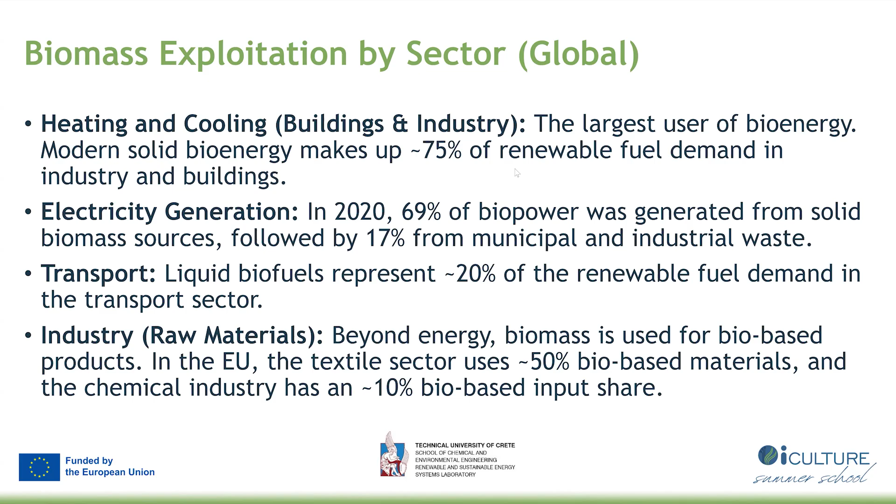As concerns the technology, biomass is very, very broad, and while I'm presenting this one, although the project is for algae, I'm trying to go back some steps to show what we know, and some of you, I'm sure, will find a way to exploit it also for macroalgae. And what this conversion means: to transform something organic into energy or other forms, in this case energy, like fuel, heat, or electricity, by using engineering methods. Yes, these methods can also be integrated in existing fuel distribution infrastructure and can cover part of the demand.

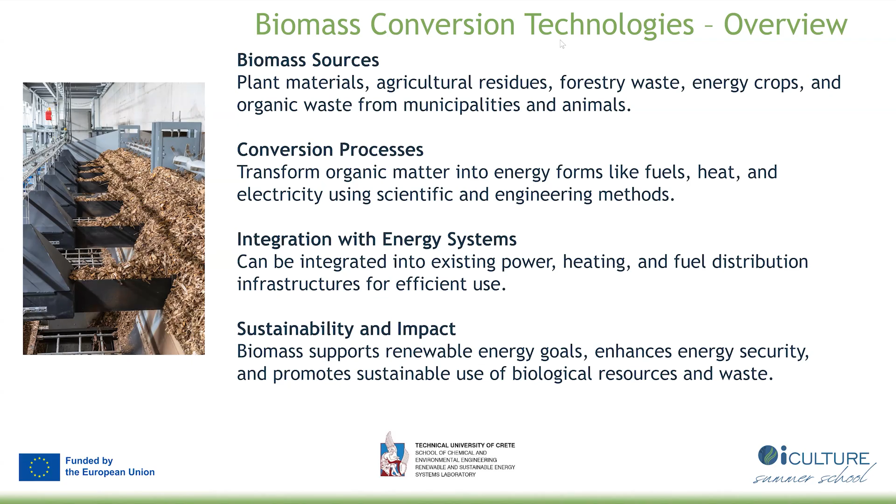And the critical issue about biomass is that it supports the global goals, SDGs, and also it's useful for security because it's a storage. It's like a battery, so we keep energy as it is, and we use it taking into account our needs. One critical point is how neutral biomass is, but okay, let's say theoretically, considering the green cycle of carbon, biomass is neutral in terms of greenhouse gases.

I follow. Next one also.

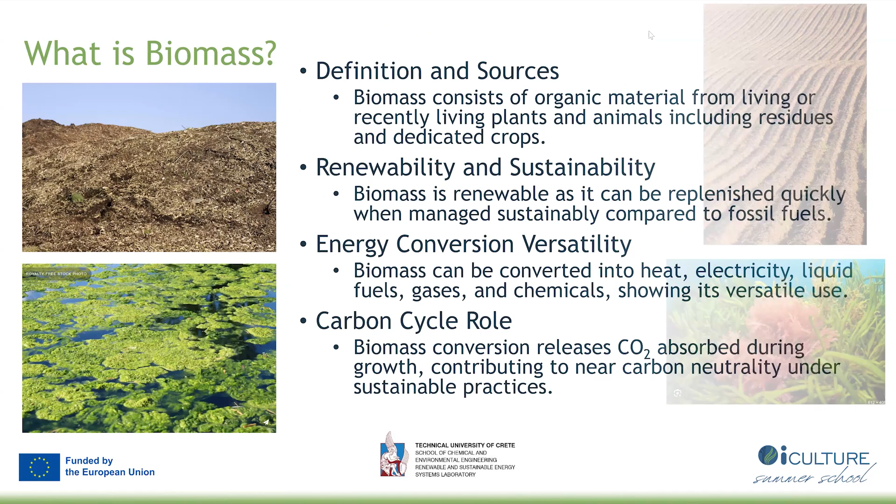Yes. And why convert, let's say, the biomass? First of all, we would like to reduce dependence on fuels or on other, let's say, resources. This is the first issue. But you should take into account that biomass was the first resource we used as humanity to produce heating or to cook. Before hydrocarbons, there was biomass, and it was the beginning with fire.

So it's old, and if you would like to see a more active role in the current, modern world, you have to understand why we stopped using so much biomass. Was it the economy only, or maybe there were other parameters, like, let's say, the comfort of using electricity instead of biomass for some resources. But of course biomass is also important, as already referred in the previous presentation by Georg, as a very important feedstock for industry.

Biomass can be exploited locally, but as I referred already, if you go to rural areas, you see biomass used less and less, because biomass needs handling, needs transport, needs effort, and we, the human beings, prefer easier ways to do our job. Biomass is also a kernel for circular economy.

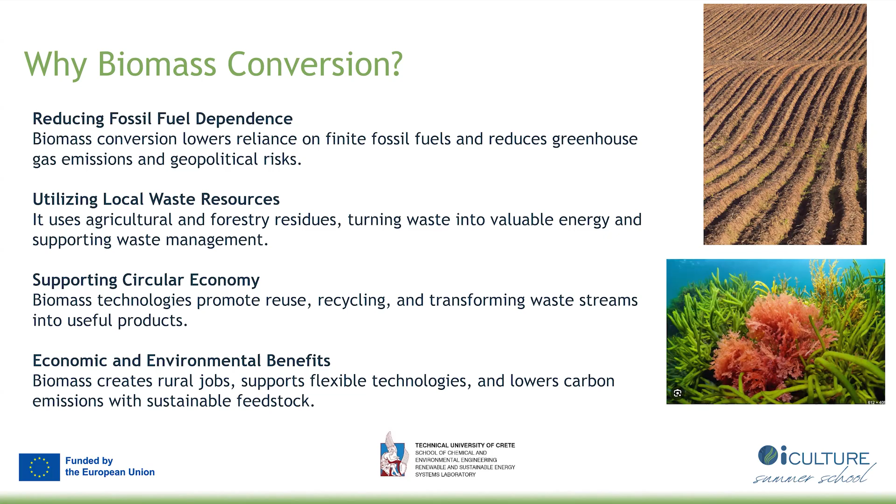And also, of course, practically, the exploitation of biomass for energy creates CO2. But as I referred, this CO2 takes into account the green circular processes of CO2, photosynthesis, it goes back again, and we consider that biomass is neutral in the annual plan. It's neutral.

The oldest technologies used to be thermochemical. Why is it important? It's very important because there's a long, long history of these conversion technologies with specific limitations, and we can learn from these previous technologies. Why? Because even if the thermochemical process is not the main target, maybe the knowledge from the past is useful to combine the biorefinery by using waste of this biorefinery in a very efficient way.

Combustion process was the oldest one with relatively low efficiency. Gasification is the other one. Syngas, mainly carbon monoxide and hydrogen. It is an old process, used during the previous century for urban heating, but also cooking, with networks.

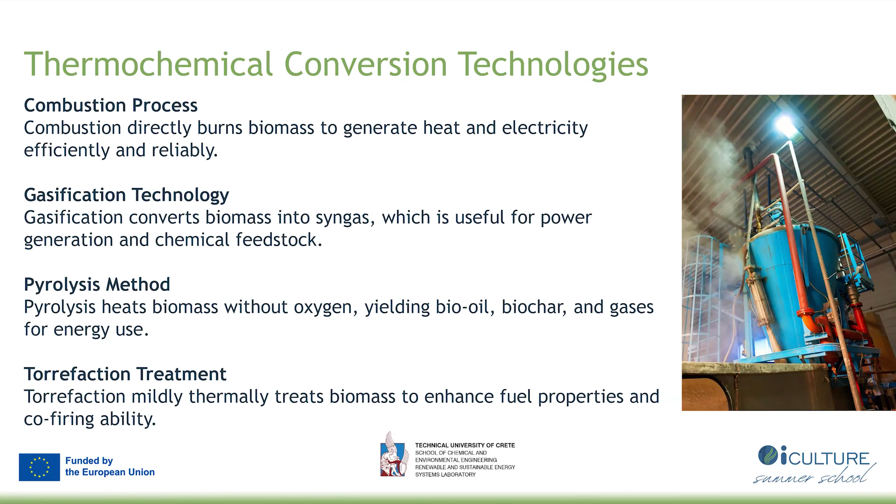And another is something more simple to increase the fuel properties and grindability. This torrefaction treatment is used just as complementary, but it's not something very important and widely used in our days.

As concerns the biochemical conversion, I already referred to fermentation by microorganisms. I have done this. I worked in the laboratory for 3 years trying to convert sugars from lignocellulosics to bioethanol and other chemicals. Interesting process, but we have to do a lot to improve. The problem here is that the fermentation is done usually in liquid phase. Liquid phase means a lot of water, so at the end we need to separate the water from the product, which is very, very energy intensive.

Methane is a common process we know from other uses. This could be a very simple process, and maybe anaerobic digestion could be complementary to other processes, not only due to regulations, I mean regulations for emissions, but also due to the availability of residues from other processes. Something which is very important, take care of this.

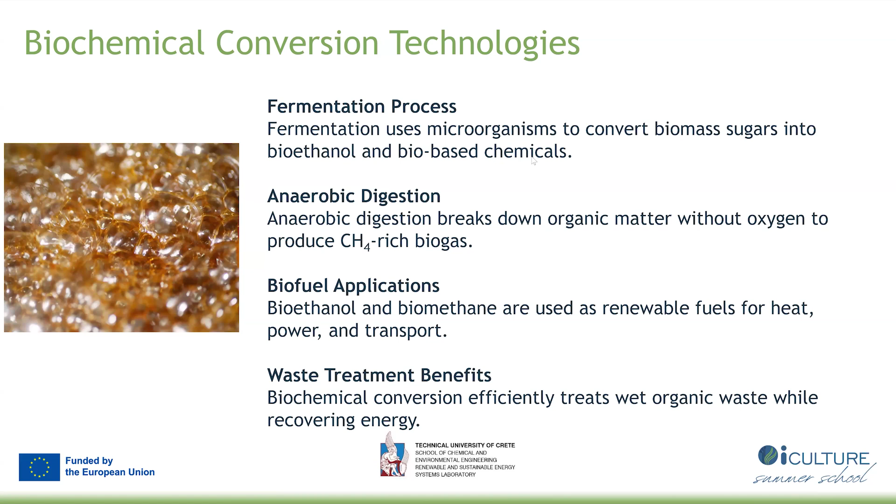Some chemical and physical processes. We referred to thermochemical, we referred to fermentation. Let's go to chemical and physical. A typical example of these chemical physical processes is the transformation of oils and fats to biodiesel. Created esters, and we will say something about this later.

In parallel, we can have some physical pretreatment. Pretreatment covers hundreds of different methods, with acid, with size reduction, with alkali, with drying, mechanical, any kind of idea. Different processes, and you can find some list of these processes if you Google our work, but with the results we're not very happy. We have to do a lot of work in this exploitation of biomass for low value products. That is the reason why we need biorefinery and we need high value products to combine all of them together.

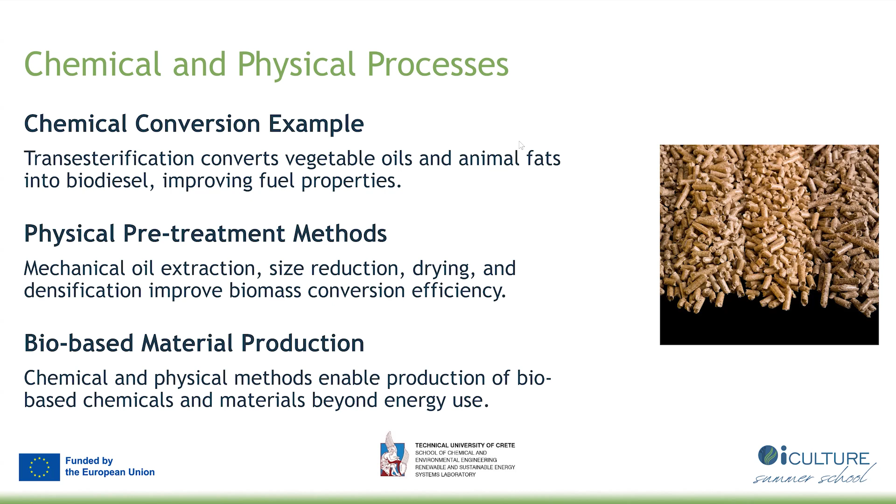We have another project on how to protect heritage—heritage buildings, or heritage, or culture. And I think we see a new trend to use these materials not for energy, not for high value, but to create materials with specific characteristics.

Usually we have a lot of applications, as we referred—electricity, transport, chemical materials—and of course all these uses of biomass support decarbonization and energy efficiency.

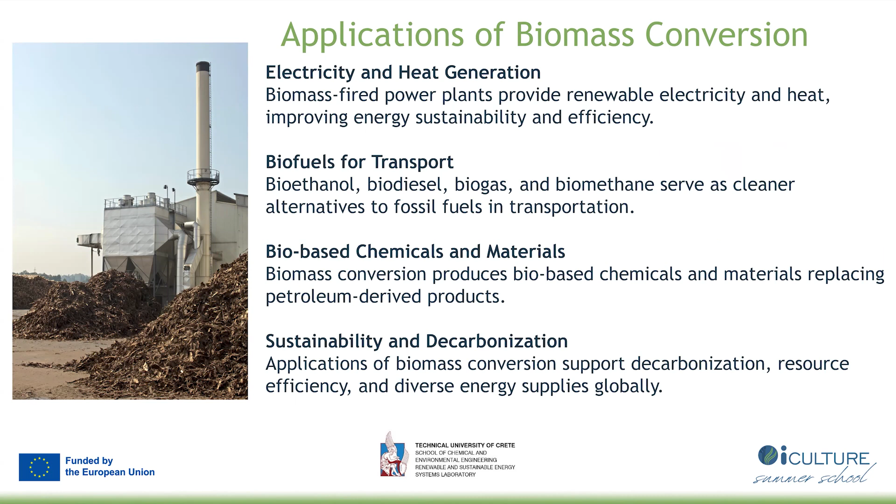I will continue with some specific elements. Advantages: biomass conversion creates energy and materials and can help rural development directly. If today it is not operating, it is becoming weaker and weaker, we have to understand better why.

Comfort is one reason, as I already referred. The other is the collection issue from costs also—we need people, and we have to pay people to do this. Maybe in the future, more autonomous collection systems of biomass can make everything cheaper and more useful.

Now some challenges. First of all, number one challenge for biomass is availability. You cannot build a process or an industry without taking into account availability, because this is also a bottleneck for scale. We need to make profitable what we do, and we need to be sure we make the supply of material safe.

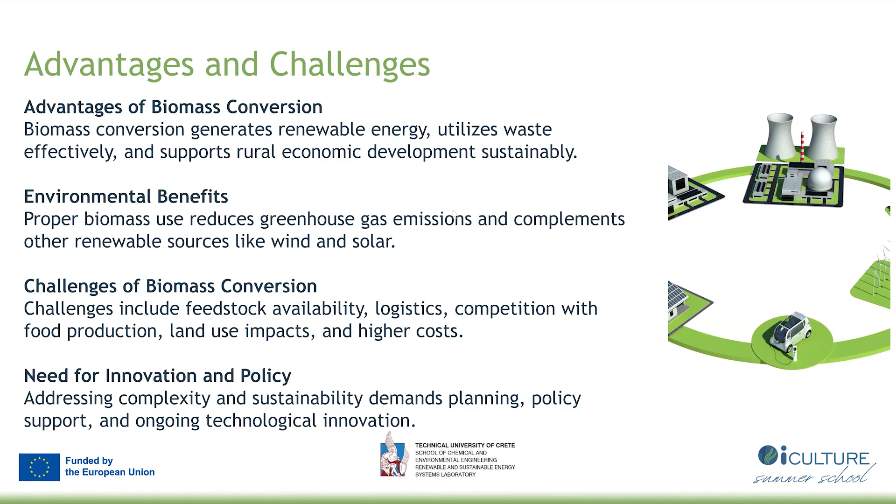What we can do is check the quality of imported material, but we don't know its real history. This is an issue, a very sensitive issue in the biomass industry. I will focus on biofuels, because I have long experience with biofuels, only as an example for you to get ideas for other exploitation of biomaterials like microalgae.

So talking about biofuels or other materials or fuels, a key for research to improve, and opportunity—if you work on emission of fuels for air, you have very good chances to be successful, because there are some teams, but not too many teams, who can do this work very well. So number one problem is aviation.

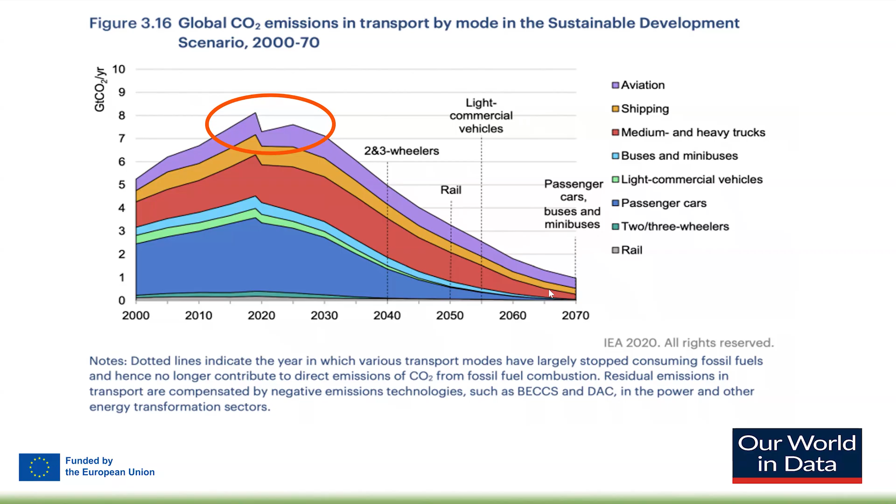As concerns the rest, you see they are minimized and close to being somehow resolved. Okay, this is one point to take into account—the opportunity for air use.

In Greece, we mainly have biodiesel, which use not only first generation feedstock, but also residues from other sources, and used cooking oil. I will show you an example later.

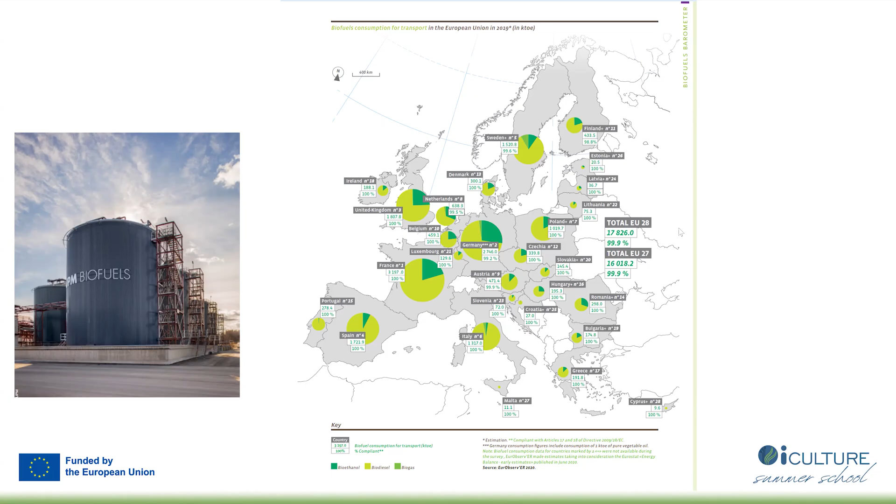As concerns biofuels, in this case we have four generations of biofuels. First was from food crops, take sugar cane, and somehow you process the sugars and ferment them, or soya beans and other products. But this was not sustainable - we're missing food globally, in Europe, China is missing food, so I don't think it's reasonable to cover land to produce material for biofuels instead of food.

The second generation was from crops, crops from agricultural waste, mainly lignocellulosics. My long experience was on this second generation biofuels. The issue is how to process lignocellulosic materials, how to destroy the structure with different ways - pretreatment, whatever it is - and produce enough sugars for further processes. The problem is that in parallel to the production, you also have degradation of sugar to other products.

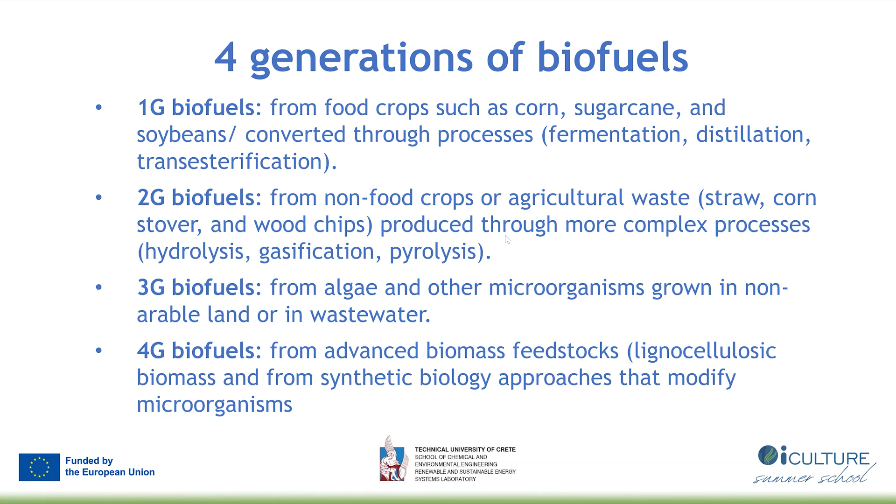As concerns bioethanol from lignocellulosic material, we have something like prehydrolysis to separate hemicellulose from the rest of the material, but not only hydrolysis - we have other pretreatment ways too. For instance, putting everything in water to break the lignocellulosic chains, or using alkali to help this deconstruction. It's interesting - if you're interested, we can discuss. You can send me an email, because I've spent several years of my life on this.

Hydrolysis is the main way to break the crystalline structure and produce glucose. The majority can be glucose, but not only glucose. Why glucose? Because D-glucose is very popular for microorganisms like Saccharomyces cerevisiae. And at the end, fermentation is the last step to convert sugar to fuel ethanol.

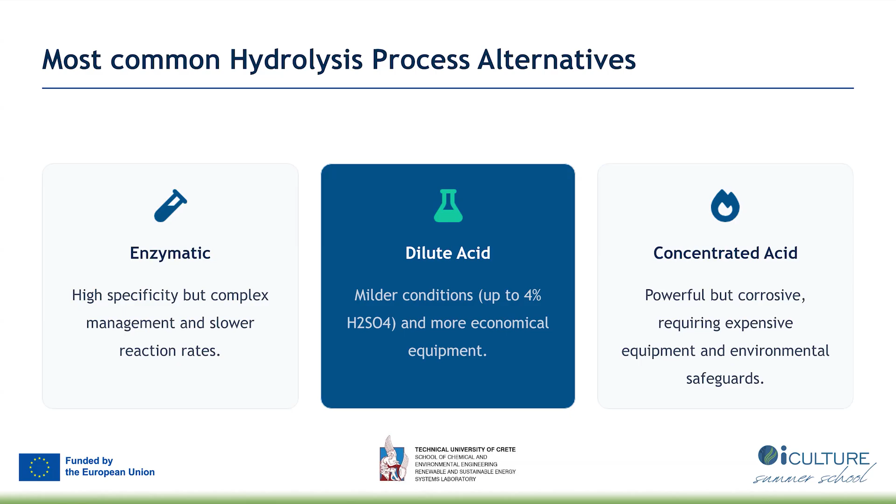Dilute acid was most classic - you can use classical sulfuric acid, we avoid others like phosphoric or nitrogen-based acids. This is most common, but we don't need too much to be very clear - it's just to help break this chain. Concentrated acid is also very powerful, but in addition to safety regulations for equipment and environment, concentrated acid is concentrated, so you need to act very, very quickly, or you may destroy everything.

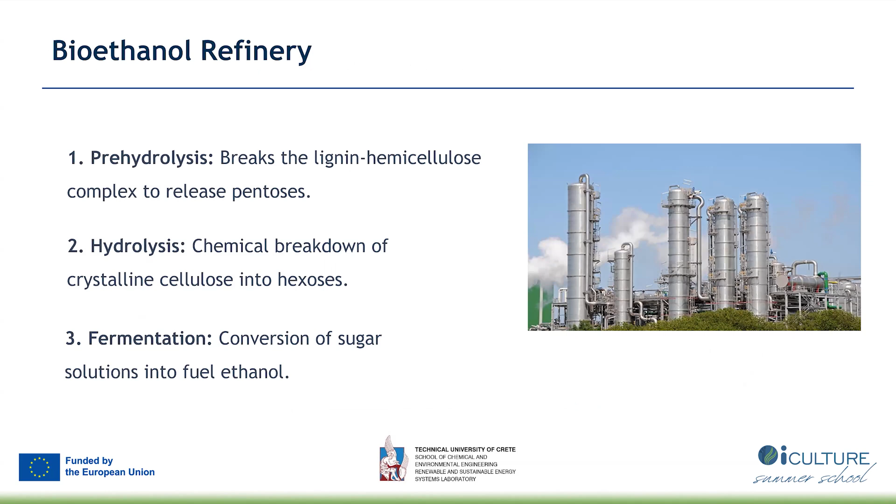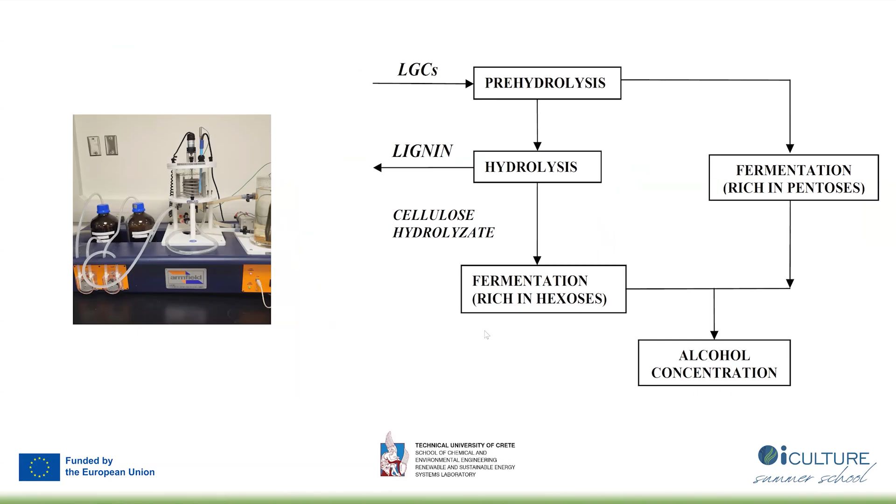Okay, this is a simplistic way to present these processes. And this is the key: cellulose to glucose - big part glucose, not only glucose, but a big part - and then degradation products. Why am I presenting this? Because cellulose is something sensitive, and when we produce glucose, under the same conditions it has a trend to go to degradation. So if we leave this process for a long time, everything will become degradation products. We have to act very fast, if possible, to produce glucose and avoid degradation products.

Why? I'll explain. This is not only because we need efficiency - we lose the concentration of glucose from raw material, and we need glucose to ferment - but also we do something very bad to this liquor. The K is the Arrhenius equation - if you see in this typical Arrhenius equation, it takes into account activation energy, R and T the temperature, and has this coefficient Cn. We've created some models and published work on the role of acid in the kinetics of cellulose transformation to glucose - this is the acid catalyst playing this game.

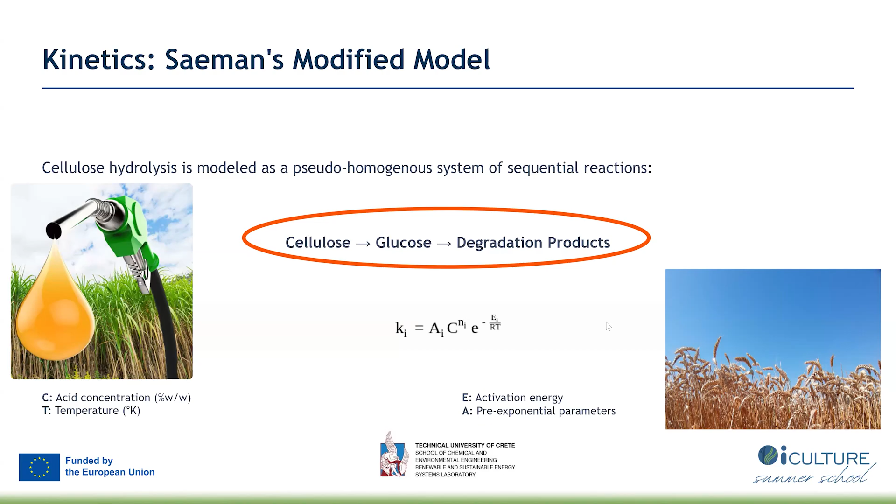Here is a very important issue. D-xylose produces furfural, and D-glucose produces hydroxymethylfurfural. Both of these are poisonous and can kill the material, stopping the operation of the microorganism. You cannot ferment, or it becomes much slower. These degradation products have a double effect: they minimize the glucose concentration, and they create an inhibition effect on fermentation of the product.

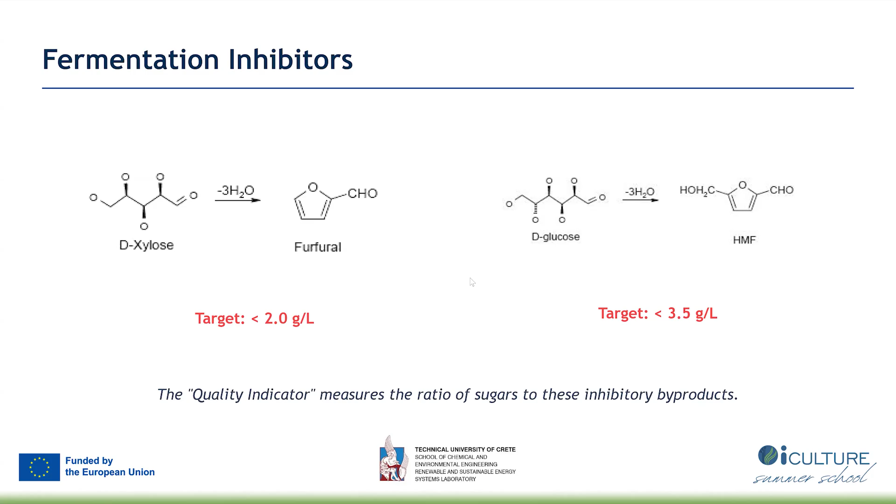In this table you can see some of the models we created in the lab. This is relatively old, published 15-16 years ago, but we created kinetics of lignocellulosic hydrolysis for different materials: corn stover, wheat straw, hardwood, etc. This story continues and remains fresh, but nowadays we have more tools to work with.

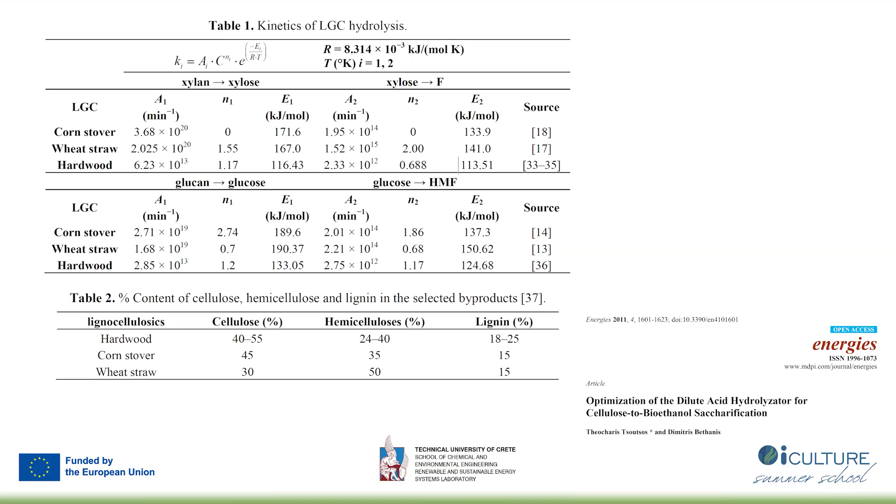Important: macroalgae, as already referred to by Georg, have no lipids, but microalgae we have a lot of. So we can produce somehow, and see a full chain and this life cycle, and this can be an opportunity for the future, yes.

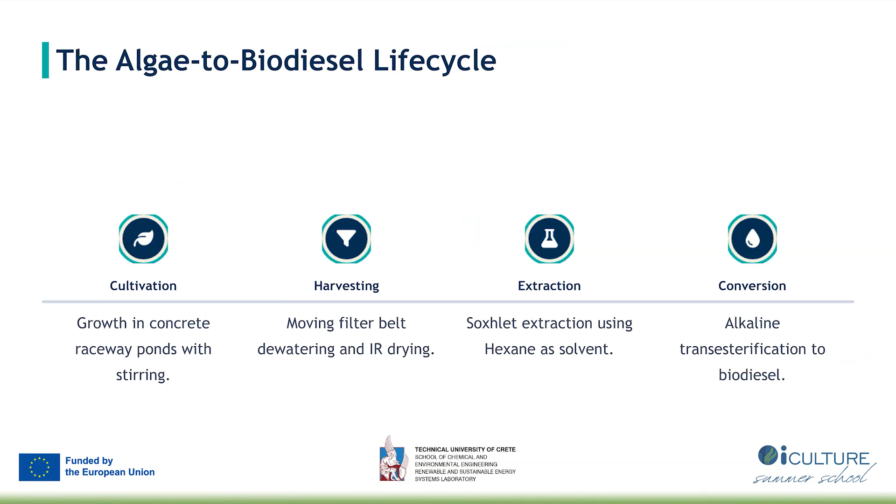Potentially you have large surfaces with water. We can develop some cultures and see, but land is always an issue. Most of the wars were fought for land and for energy, so it's not something we have to forget. As humanity, we have a lot of experience from previous researchers, and now with all these tools available, we can select and exploit the previous knowledge for other applications and create innovation.

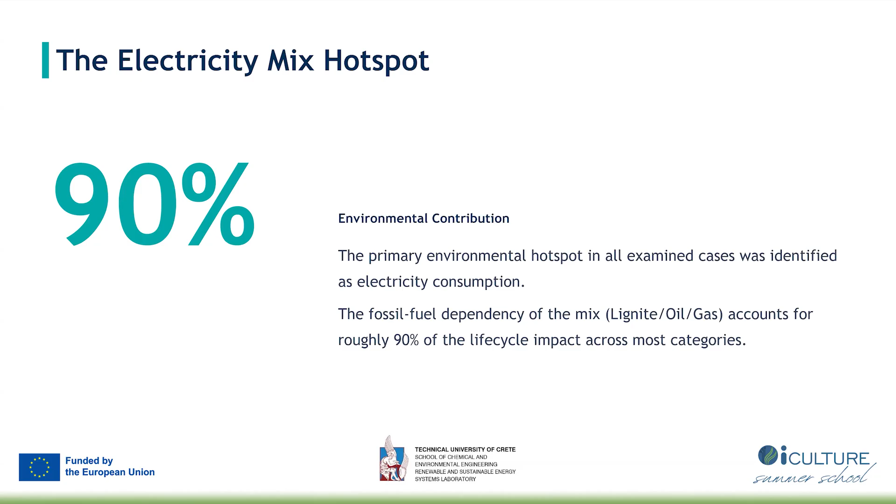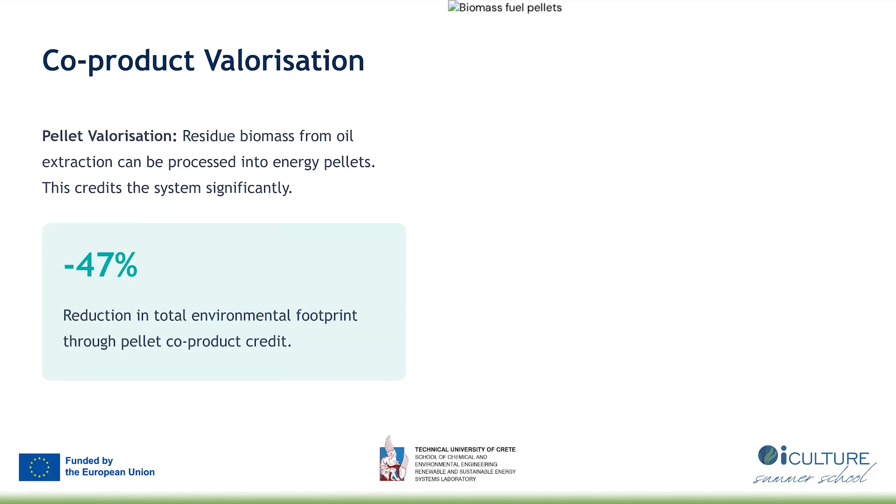The best for closed systems in our analysis, in the case we examined, 90% of the environmental problems were due to energy. Also something very important: by using the co-product from algae exploitation, we minimize the total environmental footprint by 50%.

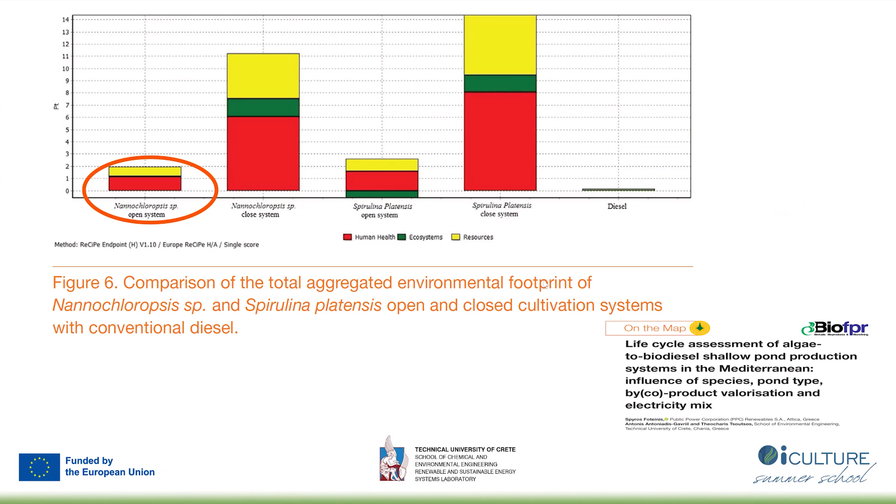I know that maybe you see what this is about. Try to think the same way, compare with LCA with other methods to see this impact, and you will be surprised when we take into account the full chain of your findings. This was really a finding - that producing biodiesel from microalgae was more of an environmental problem, a bigger problem for the environment than petrodiesel.

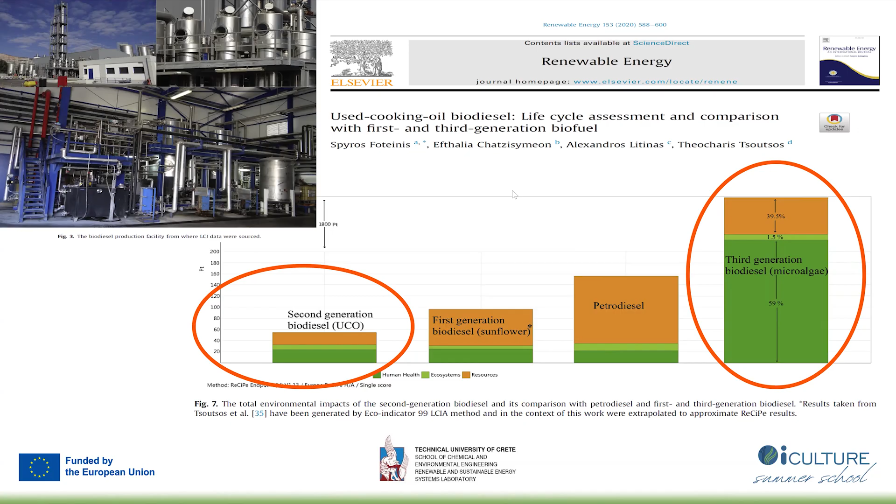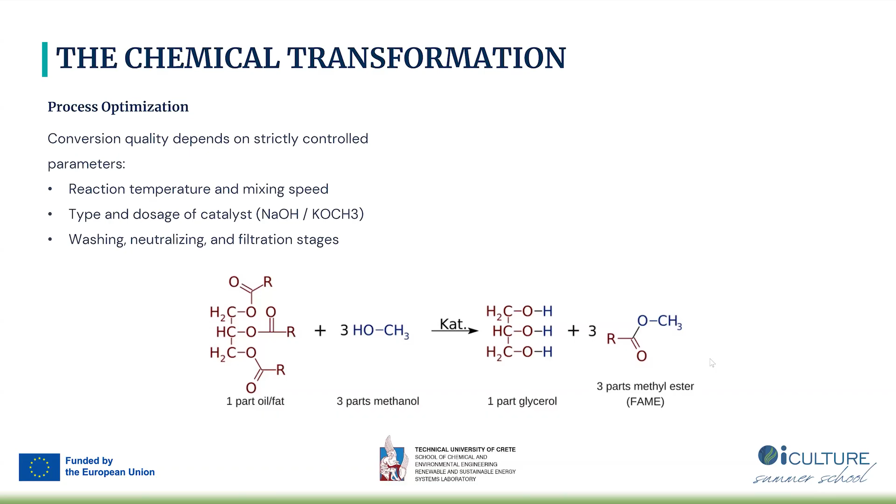And something about this transesterification with lipids: the use of free lipids with methanol and the catalyst produces glycerol, and the famous material there is biodiesel. Okay, that's for you.

We have checked the production of these biodiesel products by following EN 14214, and we have seen that this biodiesel had very good characteristics following the standard. In Greece, usually this biodiesel is mixed with diesel to cover the highest part. Now we try to be more than 7%, but we're always missing the raw material to change the lipids, and we're missing material.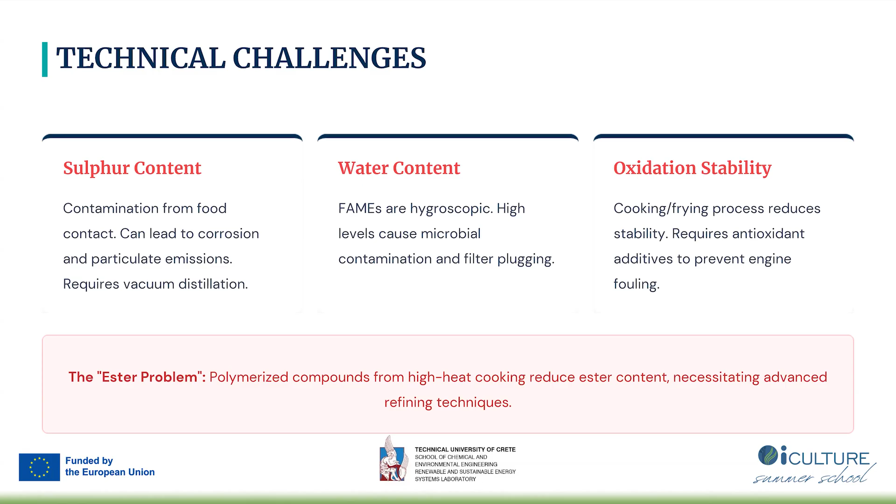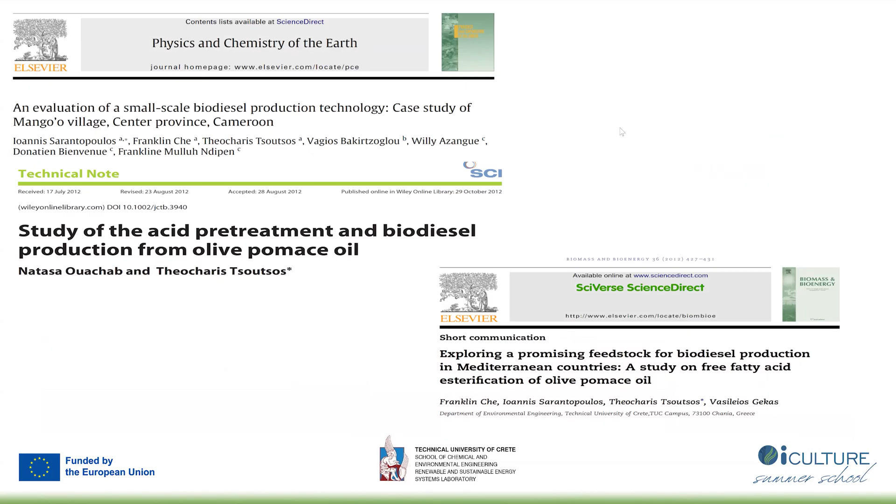So bioproducts are very good, but the stability is smaller than, let's say, these products which are linked with petrol, but this is, I think, the main disadvantage. So it's not forever. They have some time, but we need to know how long this system can be used. For instance, we know that for biodiesel, we need to consume during the next year. It's better after the first year; the efficiency is coming less and less. The same with biodiesel. There are a lot of studies on this.

Something important, of course, is not the same as macroalgae, but could be a very good example to use for some purposes, because, as maybe you know, in the Mediterranean we produce a lot of oil. This is famous, well known, but we produce a lot of used cooking oil residues from houses. So practically, if we cannot collect this, it goes to waste treatment. That means energy consumption, materials consumption, pollution. And what if we can collect that and reuse it?

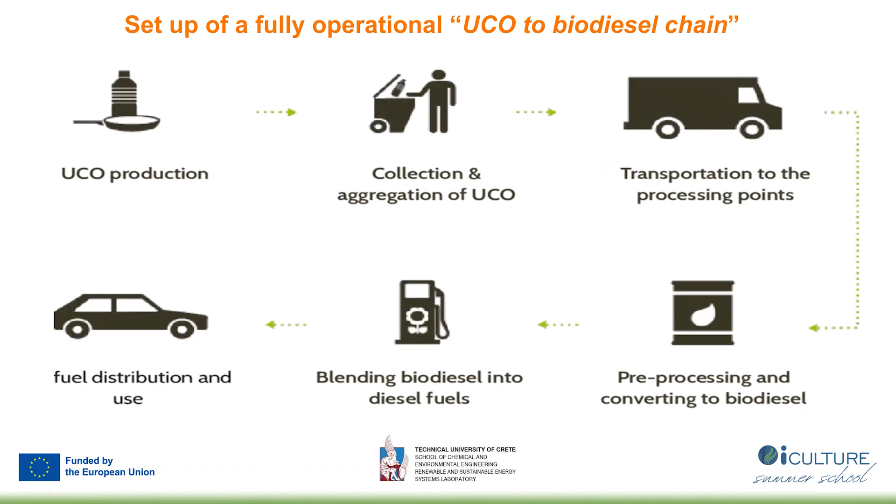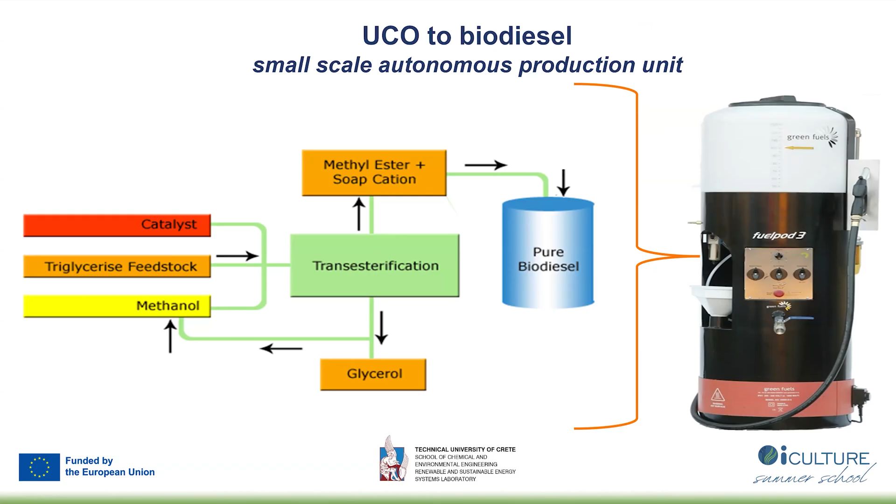So the idea behind it is to create a full chain: how to collect from houses, from restaurants, whatever it is. In most of the cases, restaurants were more organized. Start from the material and produce at the end biodiesel. This system is still in operation, and we can produce about 70 liters of biodiesel per day with this system, and we have created some campaigns for this.

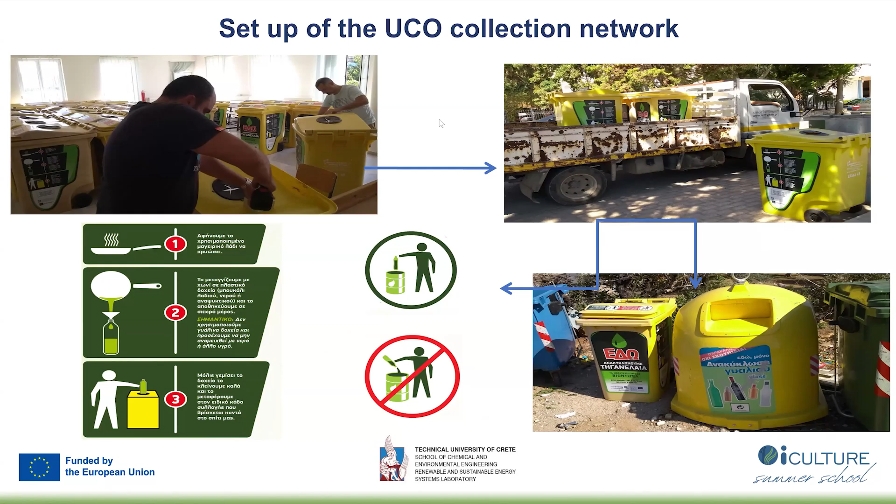In cooperation with each municipality, with the people, you can see how we construct in a cheap way. We use very cheap material now during the years, and we hope that very soon we'll be happy to show you the next generation of collection points. And you can see also our team, they put sensors inside to monitor what's going on.

It was a competition with children, so every year the children in the schools, for several years, collected the used cooking oil from the houses, and at the end the schools get something good for them, let's say a laptop or something like that. This is a very important point.

If you have concentrated this material, you can sell used cooking oil at about half a euro per liter, which is very high. So you need to control all the collection, also for environmental reasons. But this experiment, let's say, was not very expensive, our construction. This system was operated for 3 years and was successful in its results.

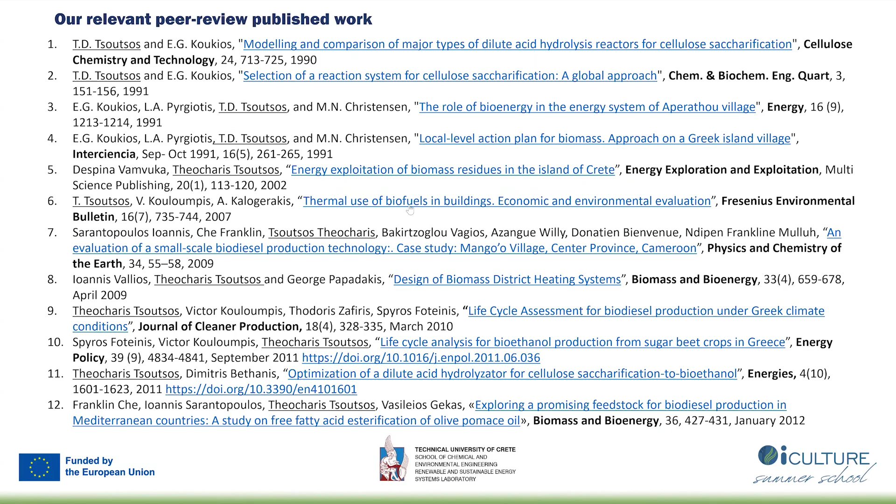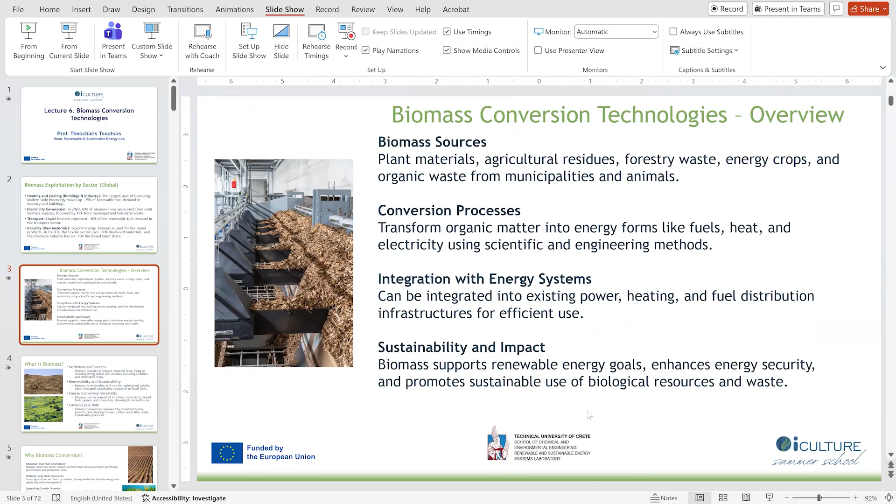Some publications. All this presentation will be uploaded on YouTube, and you can see a list of these publications. I try to give you a broad, let's say, a broad description of our experience till now, hoping that we offer some good ideas for our future.

And something very good: usually the infrastructure, the laboratory we used for these experiments, was not very, very expensive. This means that you can make fantastic analysis, fantastic work with no high cost. But please exploit what happened before you, as there are generations who work on this.

Thank you. I hope it was not very boring. Christos, I will try to see if there's a question. Thank you very much, Professor. Yes, there are two questions in the chat, yes, please.

One is about what is the real solution to apply laboratory results to the pilot scale in biorefinery? Yes, I think we have already referred to this also, Georg. What we do, also Christos, it's the same thing in LCA. We try to translate laboratory results to real scale. What we do is stage by stage.